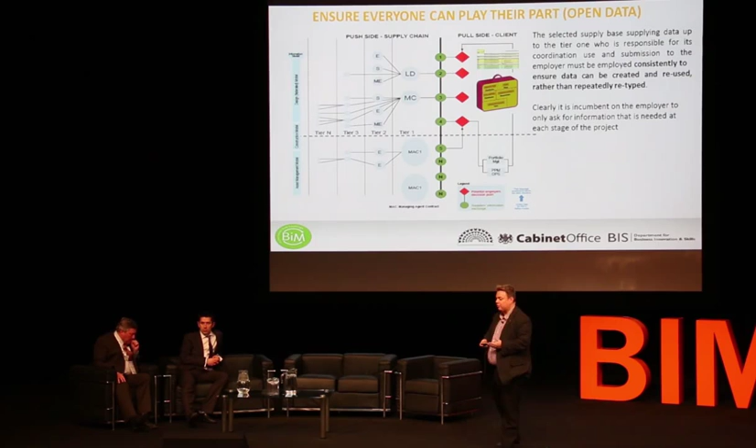We can describe the data and have a way of effectively managing it in a way that everybody can play. And that's why COBie has been a key part of it, but also the need now to start to think about both the core classification systems and the way of describing consistently the amount of geometry and non-graphical data that's in there. It's also been really key in terms of what we're doing.

So we've got to think about that coordinated data set. And I think the big thing about BIM - and it's key - is that thing called information growth. So as a project is progressing, the data is progressively growing, but it's constantly aligned to a need or a plain language question. So we've got data growing both geometrically and non-graphically.

And I always think one of the best analogies is the world of - I take it, has everybody got a washing machine in here at some point, or been involved in the purchase of a washing machine?

Excellent, so we've got about half the audience that's procured washing machines, but you think about the information needs there, you find most of the information needs are non-graphical in nature. It's maybe warranty data, cost data, and there's maybe only one bit of geometrical data - does it fit within my volume space? So that's a good example of maybe your plain language question is answered by something that has got low level of detail.

But maybe high level of information. So it's what information is appropriate to a capital delivery phase drop - you can see the drops there. And we use our data, we want to describe it to answer a plain language question, either through COBie or a 2D PDF. So data growth and being able to describe that amount of data is really important, because the big part, if we don't get it right, we end up with too much waste in it.

And this is a key concept in terms of the digital plan of work - right amount of information at the right time. It's a bit like the Goldilocks enigma we've got, it needs to be just right. I think we're in danger often of trying to, especially in terms of all the BIM, put too much information in the model right at the beginning. We start to limit maybe optioneering and such like. So getting the right amount of information at the right time by all members of the supply chain is really important. By doing this for us, it means we get the right amount of information prescribed, we can test it and validate right the way through in terms of what we're doing.

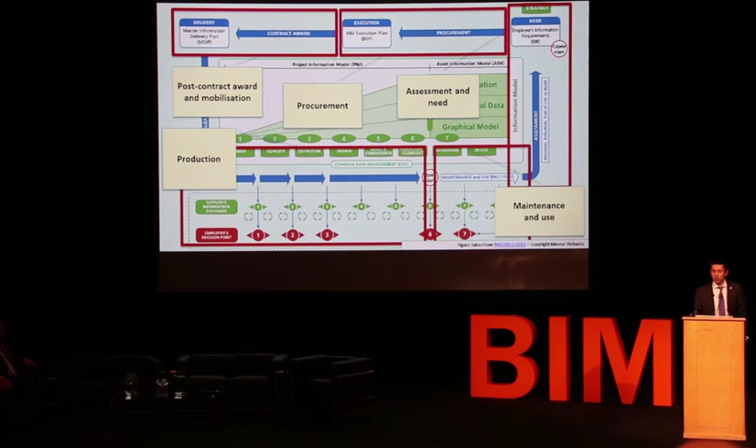So just looking at the front of the diagram from PAS 1192 Part 2, credit Mervyn Richards, you'll see this sort of circular diagram that looks at the construction process, starting in the strategy stage, assessment and need, moving through to procurement when you're bringing consultants on board, pre-contract, then post-contract, going through the production stages - so all of the design and the construction - and then ultimately coming back into the sort of asset management and using that digital data to manage the asset. And we're going to look at maybe a few of these stages step by step.

So initially, let's look at that assessment and need stage as defined in PAS 1192 Part 2. This is the stage where the client's looking at their existing assets and determining, when they're starting off on the next project, what are the plain language questions that they want to answer with digital information. So in addition to procuring a physical asset, also procuring digital information. Think of those plain language questions, what tasks, what deliverables are required, and aligning them to the particular project stages - and then that being part of that overall tender documentation.

Let's quickly look at the data structure behind a project. At the top project level, you have properties such as the project reference, the title, maybe an image, its location, and a classification of what type of project it is. Moving down to the level below that, there are also properties aligned to each stage.

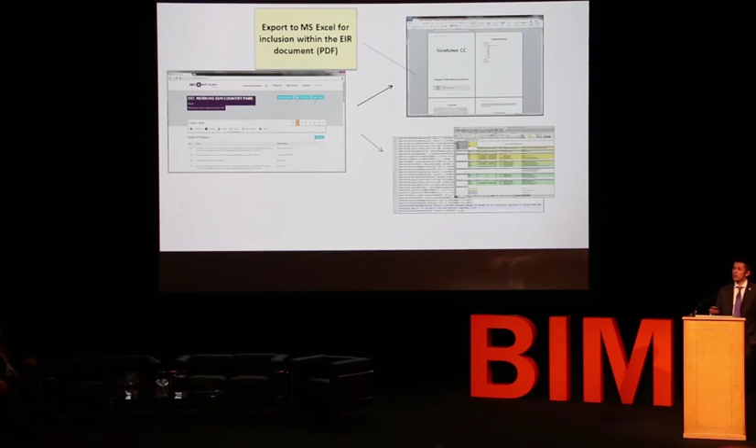That can go into the common data environment as a record of the employer's information requirements issued out of the office at that time. In addition, you can export it into open data format, a language that computer software can read. We're talking to lots of software companies about how you can push this information from our system into other systems.

I imagine 99% of the industry's interested in the top one at the moment, using well-structured information to create a standardized PDF. But more and more people are interested in working in that digital, well-structured information as well.

Here's a little example of the top example. It's all been exported into a nice, friendly Microsoft Excel format. You can manipulate it, and drop that straight into an employer's information requirements document. It's a fantastic template on the BIM Task Group website, I think it goes in section 1.4, which are your specific information requirements at those stages.

So let's move around that project lifecycle a little bit further, to the procurement stage now, where a number of bidders are responding to those employers' information requirements. What they can do is take that little export file, the digital data file, and import it into their project area.

And they can respond in terms of their capabilities: I would do the task in the following way, I cannot do that particular task, I'd suggest the following deliverable. Against a particular project stage, the bidder can say which organisations they'd employ in terms of their supply chain that would fulfil those deliverables and those tasks.

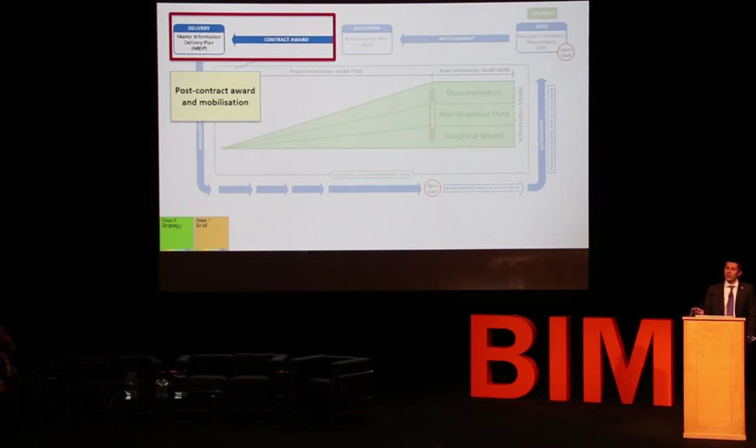And that cycle continues through the mobilization phase, and then into the design and construction phase. So through that production, through stages 2, 3, 4, 5 of the digital plan of work, this is when the federated project information model is beginning to grow.

And what the digital plan of work's doing is defining the requirements, who is doing what and when. It's not some fancy 3D software that's in 6 months going to take on all of the different 3D design packages. It's doing quite a simple job: an online tool that works on a standard data schema that allows people to define who is doing what and when, with reference to all of the technical content I'll come on to in a second.

And that's going to allow clarity in terms of information exchanges between the supply chain, all ultimately filtering back to those original plain language questions that the employers set in the employer's information requirements.

Deliverables are those digital representations of the physical. A deliverable could be an auditorium, a floor covering system, or a retaining wall. It's what's modelled that represents the physical - that digital information that people maybe associate more with building information modelling.

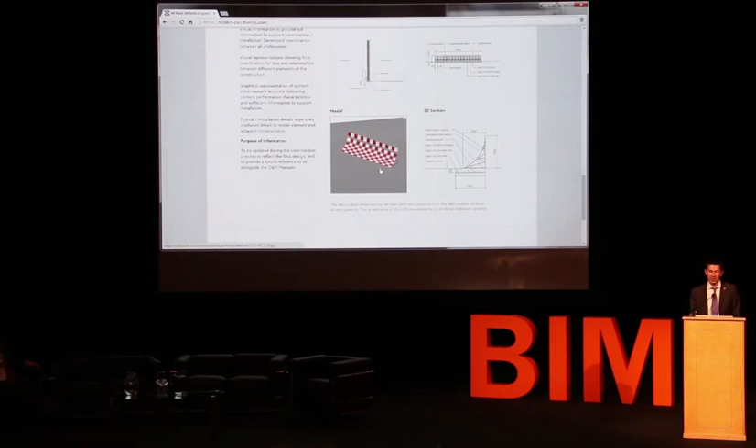I love that one. Just a few examples to put on the screen - we've got rail, highways, water, waste, a bridge deck, and here's another favourite: wastewater scum removal. They had scum removal systems in my old high school, but it wasn't fun. I survived. I think we've also got a bottom scraping device, which is another one I love.

But there's a fantastic array of LOD and LOI guidance and reference definitions that can be used when you're putting that digital plan of work together.

Moving on to classification a little bit, UniClass 2015 is the unified classification system that's going live at the moment. In addition to all the feedback that's come in from industry groups like CPIC over the last 3 or 4 years, which has been taken on board and incorporated, we've also developed a mapping strategy inside our content management system.

So you can see we've got mappings to the NBS specification codes, and also mappings to the RICS NRM1 stroke NRM3 codes. For example, solar heating system jumps across to 5.5.3 heat sources in NRM1. And for those cost consultants who are members of isurv, you can click that button and jump across to the NRM guidance documents at the right place.

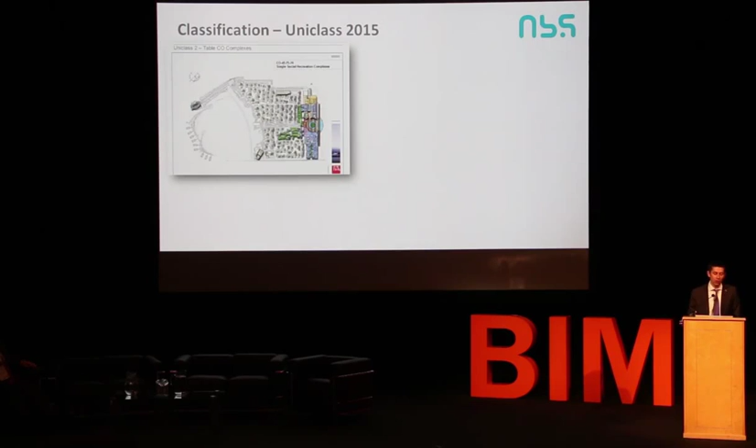UniClass 2015, in one slide, is based on the international standard ISO 12006 Part 2 framework, which is unified between buildings and infrastructure. It's a coherent set of tables built for BIM, with tables for complexes, entities, activities and spaces, elements, systems and products. Imagine a big Russian doll that you keep taking the top off, getting smaller and smaller.

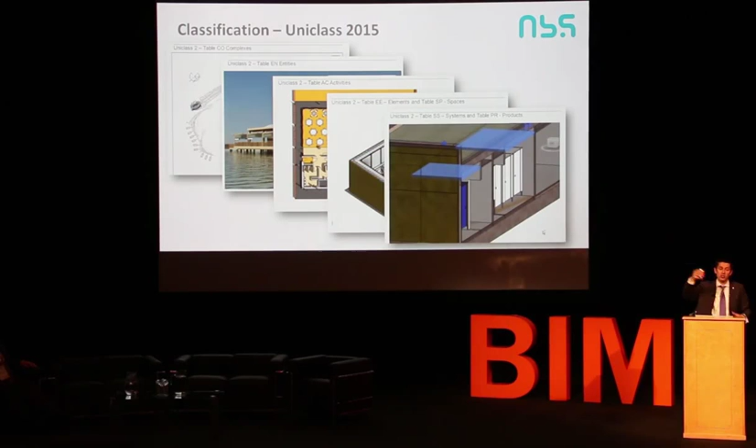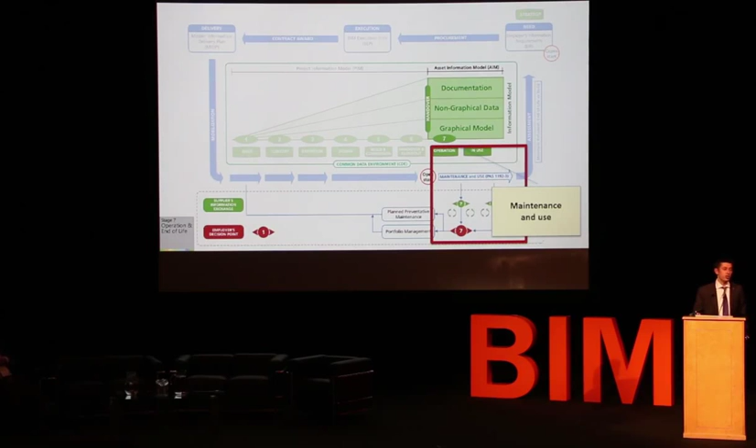So, last couple of slides from myself here. This is the end of that digital journey where, on a particular project, you've started strategy at brief stage, gone all the way through design and construction, but ultimately this is what the asset manager wants. They want to be able to go to an asset in the building that needs to be maintained, such as a boiler or a chiller or a road that needs cleaning and gritting, click on that, and get the digital information that's been asked for at handover.

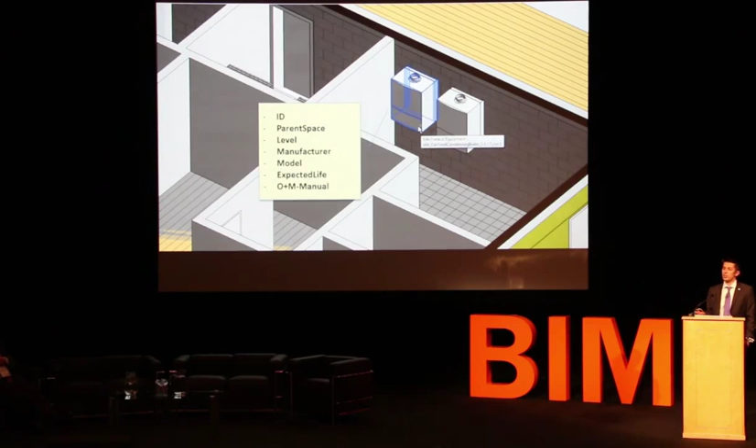So you know straight away that this particular boiler is in a particular space, on a particular level of a building, what its manufacturer is, its model, its expected life, and what its maintenance manual is, which probably is just a PDF. If we can get that data to that stage, make COBie happen in the background and not get too worried about Microsoft Excel, then that's the ultimate goal of where we want to be.

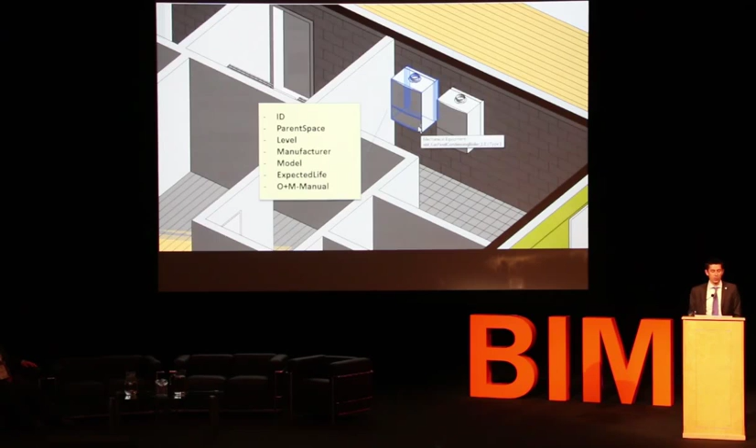So what I'm going to do now is hand over to Professor Steve Lockley from BIM Academy to talk a little bit about verification, validation, and BIM submissions. Steve.

Thank you, Steve. Just a slight observation as somebody who's on the other side of the fence looking at it from the BIM users' perspective, the amount of data and work that these guys have put in is quite phenomenal. If you get a chance to have a look at this in the next few weeks, you'll get some kind of insight. It's a good piece of work.

What I'm going to try and roughly do is explain how we glue this together with what you were doing out there with your current technologies.

Steve mentioned we're more on the R&D side of things, so the stuff that I'm showing you now is on beta, and it's still a research prototype, but it's going to be quickly formalised in the next few months.

As Steve mentioned, it's funded by Innovate UK, which is the UK Technology Strategy Board. We have built this in the spirit of openness. It's built on the XBIM platform, which is an open BIM software platform that the BIM Academy has developed and, working with industry, put out there over the last 4 or 5 years. It's open source, so people can engage with it.

And there's a team of people coming from all sectors of industry who are now working on this. So I'm presenting not just my work, but a lot of other people's work who've engaged in trying to make this happen.

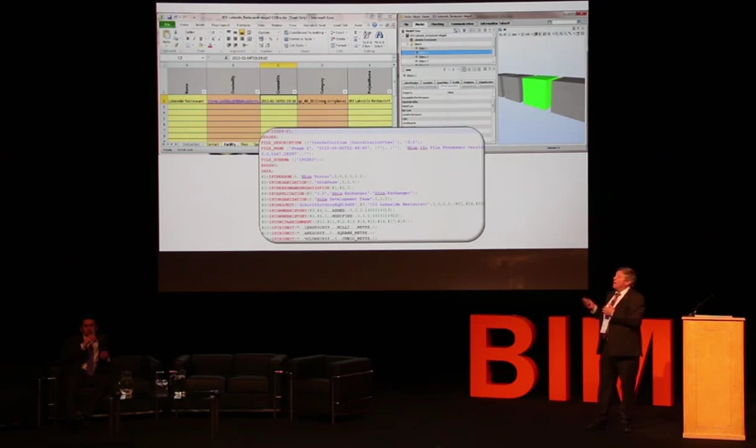You take those requirements, bring them into your BIM tools, and start doing development. We are completely BIM platform neutral, so we're using IFC to bring the data in. You work in your tool of choice, and populate the BIM model with the data you've been asked to give.

There's some discussion at the moment, and we're working with the various BIM vendors to work out the most efficient way of doing that, but it's not a massively complex task.

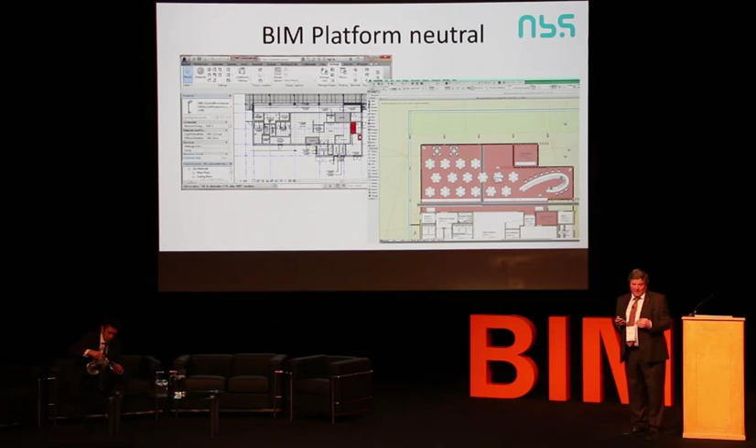Once you've done that, you can export it from your BIM tool using the normal IFC export, or if the BIM tool supports it, the normal COBie export. We provide the tools to convert IFC to COBie if you haven't got that. That's going to be part of the BIM toolkit - a service that you can use, which will give you the COBie files straight from an IFC file.

Here you might then see something like this, where my proposal for this dining space is to give you these 7 zones with these spaces.

For those of you unfamiliar with COBie, it's just literally a sort of pseudo database format. Along the bottom you'll have your systems, your components, your types, and all of the other information that you are wanting to submit to the client for their acceptance.

We've then provided a range of tools that allow you, before you submit it to the client, to look at what you've got and validate it against the requirements that you defined in the first place.

So these tools include an online viewing tool. This is a free-to-use online viewer which will handle most of the BIM models that you're working with. We've put quite a lot of effort into developing that viewing technology.

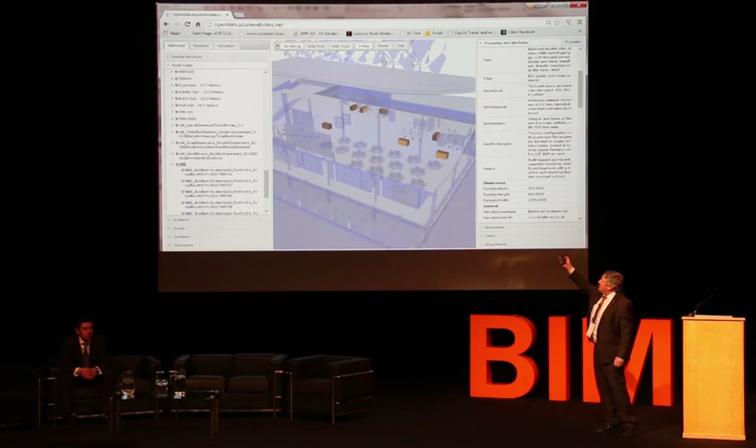On the left-hand side there, you can see the simple spatial structure - here are the asset types. I select any of the asset types and I highlight them in my BIM tool automatically so I can see where they are. On the right-hand side, I've got the various properties and information that I've been providing for those tools. Very simple, easy to review as we work through the process.

And equally, we can validate it. So you can see on the left the 3 stages: delivered, required, validated. You'll get the same view for each of those phases, and you can work out what you have done as passed and what you have done as failed.

From that, we get the COBie submission or the IFC submission, and we get the COBie requirements from the first phase, and we perform a validation.

So here's a typical COBie requirements file, and this is the computer readable version of COBie. You can see it's quite structured, it's not a spreadsheet, things are very clear. So I care about a dining area and I want a usable height of 30 metres - well, it's probably feet because it's an American model.

Those 2 are input into your validate process, and now you can see the same structure. On the left hand side I see which of the objects I've submitted have passed and failed, and on the right hand side I can easily see which properties I've failed to provide and I need to go back into my BIM tool and populate with valid data.

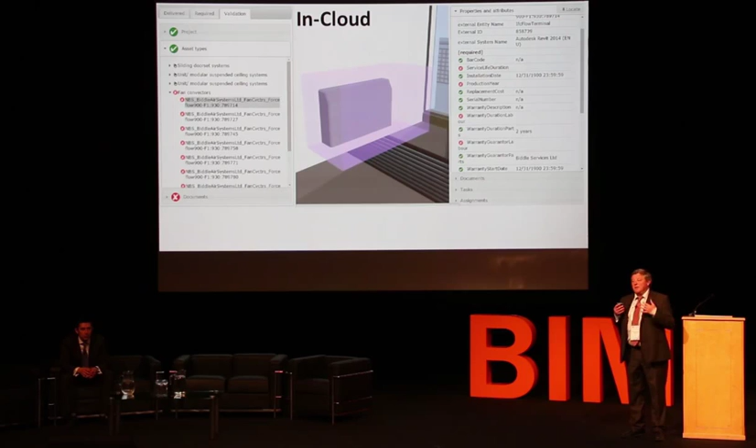This saves you having hassle with clients because you can make sure you're giving them the right information. It makes people look more professional.

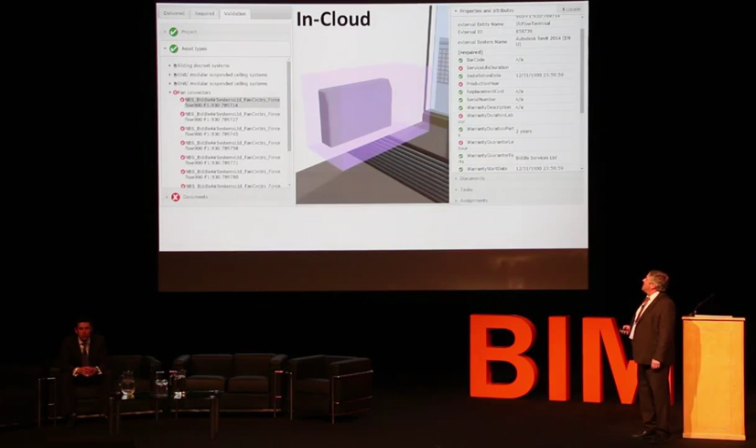This is an online tool again, which we're providing free as part of the toolkit. We also have, for the new PAS 1192 Part 5 requirements, an in-house version that you can run locally. So if you're the military or the Ministry of Justice, you can run it without going on the web and sharing your data with other people.

So we've developed a similar viewer to do exactly the same thing, but not in a cloud-based environment. So again, those 2 tools are available to people.

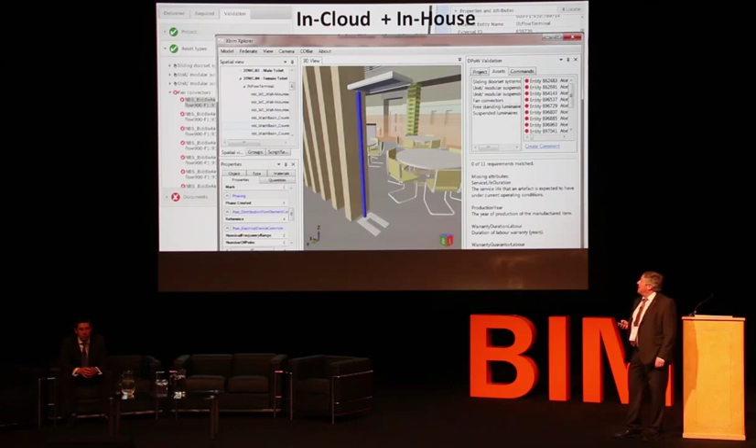For each of the failures, you'll get a page which lists the assets you've submitted and shows which properties you were asked to give, which you did give, and which you didn't. If you've got it right, there's no problem — the client will accept it and sign off your fee. If you've got it wrong, you go back to your BIM tool, put the data in, and go around the loop again.

So essentially, that's the simple process we're trying to emulate. You have a range of tools there that are all free to use. They'll be going live within the next few weeks, and there's going to be a beta program for people to engage and try them out, starting in about a couple of weeks' time, I think.